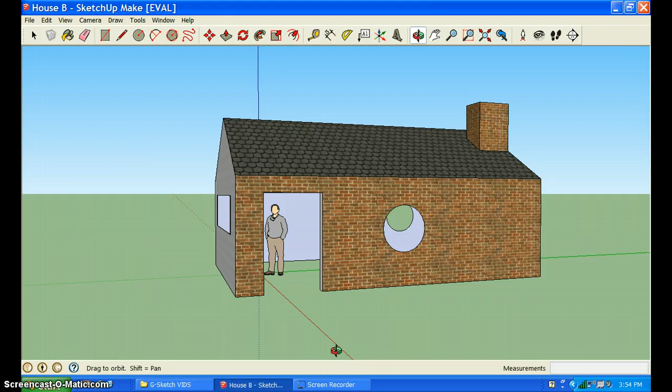This is part 3. We're going to put a little addition on the house today, a little overhang or shade area with some posts to hold it up. And in the next lesson we're going to be doing even cooler stuff.

So the first thing I'm going to do is turn this little thing around. I've got my orbit tool selected. I'm going to turn this around because I'm going to put a covered porch area on this end of the house, and to do that is pretty simple.

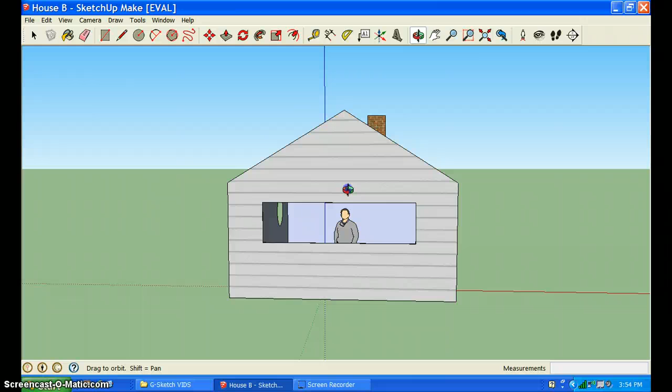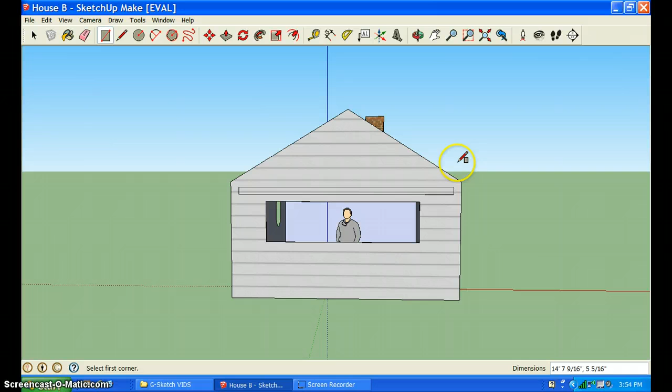I'm just going to click on the rectangle tool again and go up here. Now, I'm not going to go to the edge or an endpoint, I'm just going to stay right on the face near the corner there. I'm going to draw a wide, but not too top-heavy rectangle. There we go, that's the size rectangle I like, or pretty darn close to it.

Now I'm going to use my push-pull tool right here, and this is what you've got to be careful of. Right now I have selected the whole side of the house, and I don't want to do that. I want to select that little rectangle, so I have to make sure that when I move this down, I get that little arrow, that's what I want. See the little dotted lines?

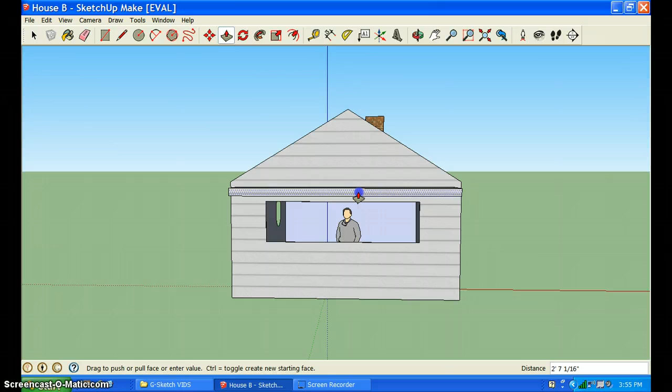Now I'm going to click and hold my mouse button down, and as I pull it down, I'm actually pulling out. Can you see how that's going? Now this is kind of a guessing game.

I'm going to let go, go back to my select tool, switch over to orbit and turn it sideways, because I don't know if this thing is out too far or not far enough. So let's take a look at it. Oh, I just got lucky there, because that is just exactly right.

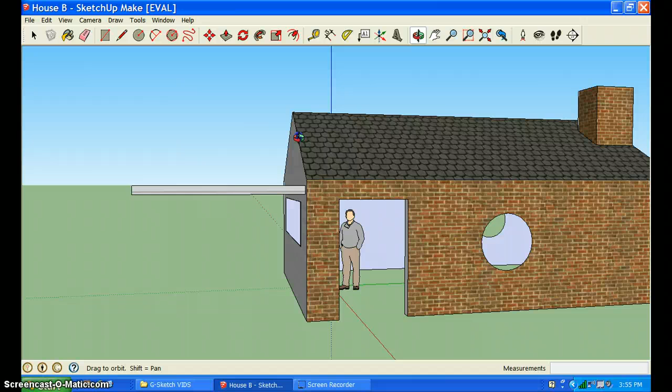Now if it was too short, I'd just use the push-pull tool again, push it in. And if it was too long, push-pull, push in, push out. Okay? So now I'm going to go over here.

Now I have to get something supported, because it's probably not strong enough to just hang out there on its own. So what I'm going to do, and hopefully this will work smoothly for me - usually it does - I'm going to use my circle tool.

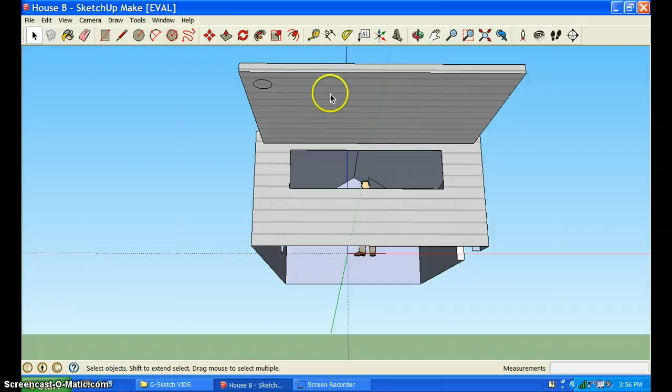And I'm going to draw a circle right kind of in the corner here on the face of this overhang. There we go, that's what I want. Now you can see I've still got the circle tool selected, so I'm going to go back and use my select tool. Always a good idea to go back to the select tool in between things so you don't get all confused and have extra things happening that you don't want to have happen.

Now I'm going to get to my push-pull tool. Now this one can be not tricky, but you have to pay attention to this one. Push-pull, and again, I don't want to select the whole underhang here, I want to select just the circle. Now, when I start to pull this down - yeah, see that cylinder? That's pretty cool.

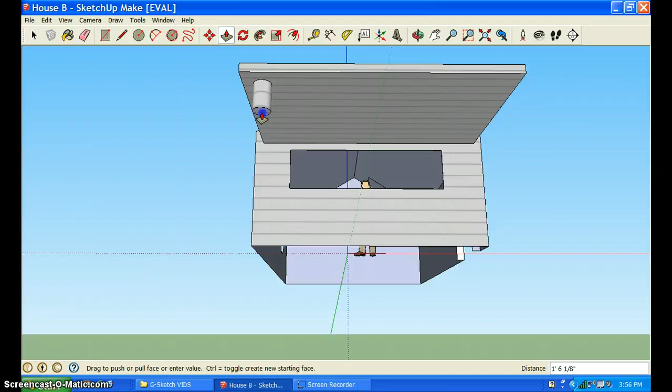But, pardon me, I need to make sure that this thing reaches to the ground. I don't want to have it going down under the ground, and I don't want it to be too short of the ground. So what I'm going to do, as I'm pulling it down, I'm still holding my mouse button down - I haven't let go of it yet - I'm going to take my mouse over to the corner of the house over here, and I want to hit a little line. There it is, this endpoint. Now I'm letting go with the mouse.

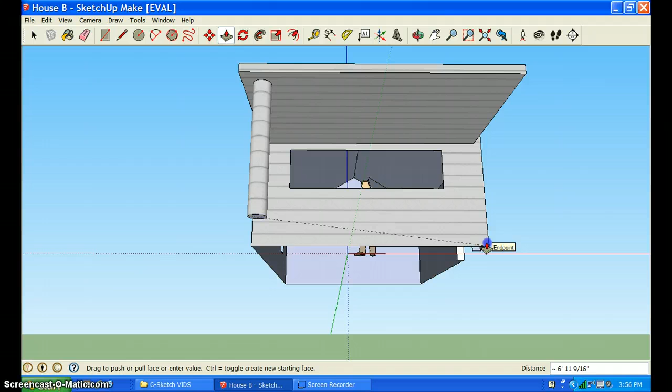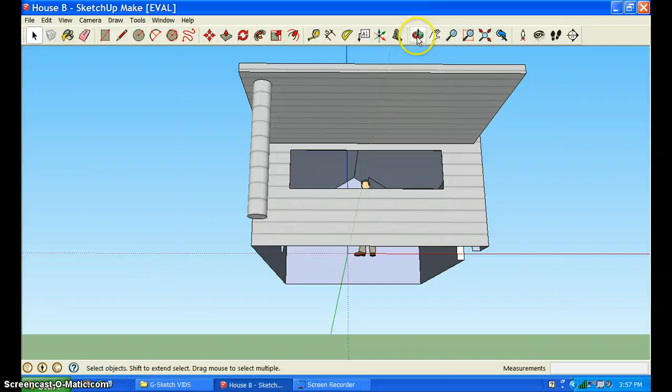I'm going to click on my select tool and turn it sideways. And if that worked correctly - once I started to pull down, I was dragging down for the push-pull tool and I was holding the mouse button down, I went over to the corner - that should have told this thing to stop at ground level. Right now it looks like the whole thing's up in the air, but let's rotate it around with the orbit tool. Yeah, see, now it's on the ground.

That's perfect. Now I need another one of those, don't I? I sure do, and that'll go up in this corner. Now here's what I want to do - I could do that whole process again, but the odds of me getting it exactly the same size and the same length, probably not a good chance for me to do that.

It's probably not going to work out too well for me. So what I'm going to do is try to copy this pillar, this column, and paste it over here somewhere. If everything goes smoothly, it'll be great. And if not, we'll have to fix it again.

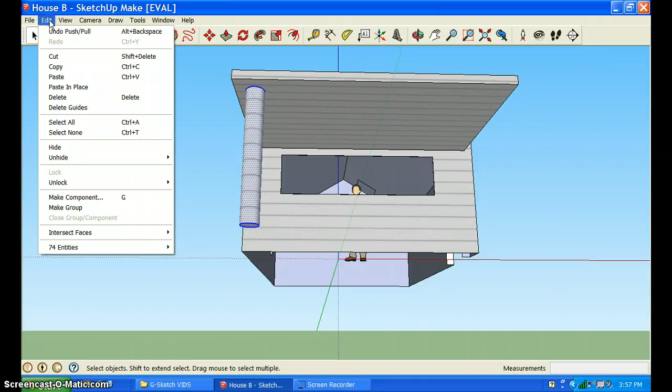Let me go here and use my little select tool. All I'm going to do is draw a box with the pointer around that column. I have to make sure I get the whole thing because I want it to turn blue. Yeah, that's what I want to have happen. Now I'm going to go to Edit, Copy.

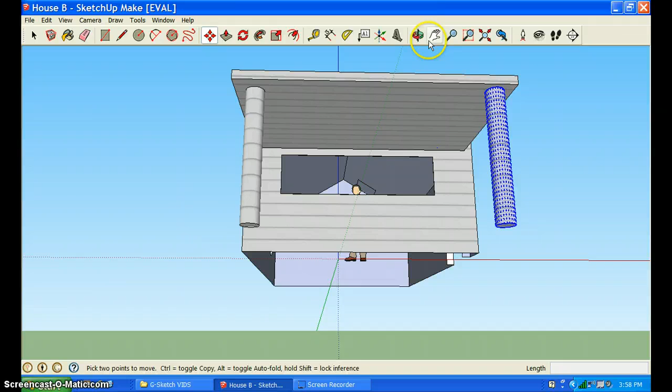I'm going to go over to here. Actually, I'll go out here even. I'm going to do Edit, Paste. And now I've got the column. There we go. Come on inside here, column. I think that's pretty much where I want it. Let me look at it sideways again. Yeah, perfecto. Now it looks all blue because it's still selected.

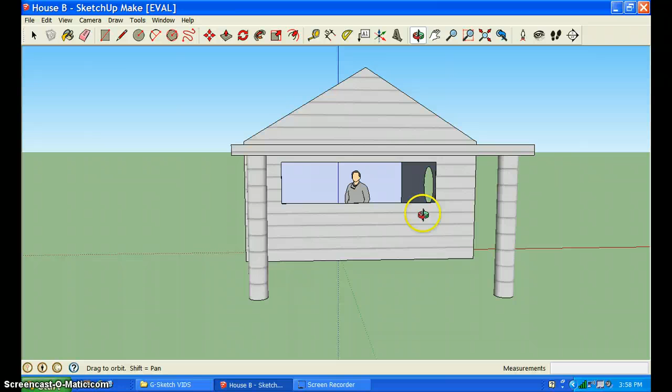So I'm going to click over here, click somewhere on the horizon, on the ground, or on the sky to deselect it. All right, there we go. Now let's take a look around. That one I didn't have to bother going to the opposite corner down of the house to make sure it was the right length because I copied it exactly from here.

So now when I do this, I can see I've got a nice covered porch, which is great because in our next lesson, we're going to put a picnic table right under here. Wait to see how cool that is.

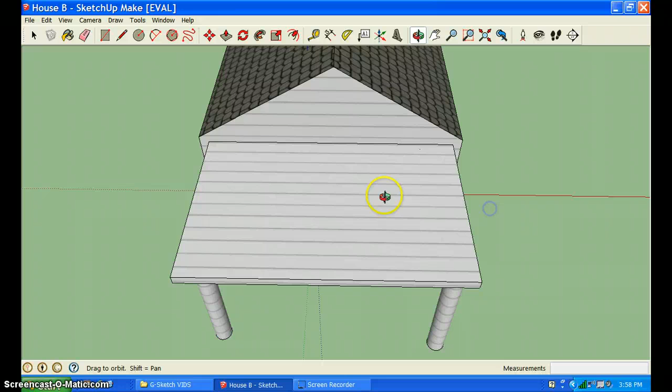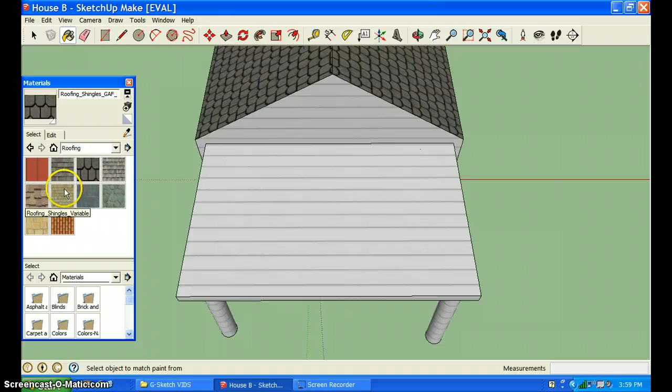Well, I got to make a few little adjustments here because I've still got the siding up here, and siding for the side of the house should not be used as a roof. So I've got my roofing here. I'm going to change this to roofing. I'm going to go over here real quickly to my paint bucket. Oh, I've got the roofing already selected. How about that? If I didn't have it, I would go down to roofing. There are my choices. I think I'll make one that matches. Here we go. And then just click on this face right here.

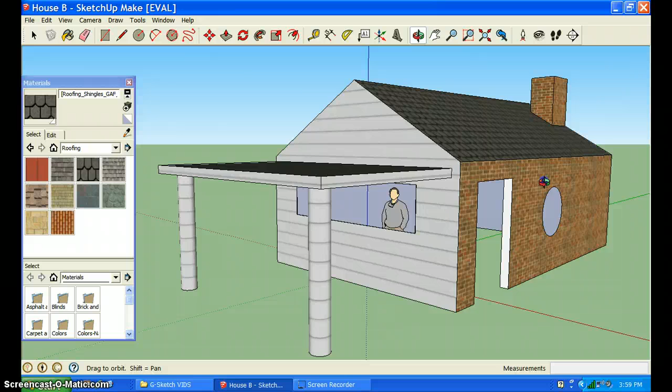I like that. Okay, now the other thing we can do is use my orbit tool, change the camera around. This little siding, that looks good, but I don't want the siding. Siding wouldn't be wrapped around like that. But I might do brick. I could make those brick. I think that would be cool looking if I can get it to work right.

So let me click here on where it says roofing in my little materials area, and I'm going to go to bricks and cladding. I believe this is the brick I used for the front of the house. I did a brick front house. I'm going to click on this and see what happens. Yeah, that's what I want. Exactly. I'll go over to the paint bucket, click again.

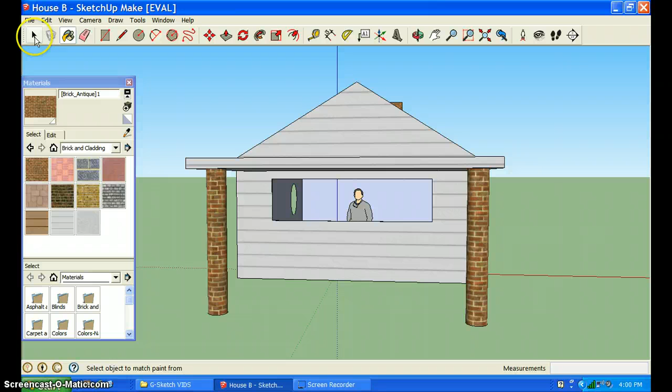And now when I use the orbit tool, well, let me go back to my select tool first. Always got to try to remember that select tool in between everything so nothing gets messed up. Now I'm going to move around here. I think I like it.

The only thing I might do for a little detail, I might change the color of this siding here so it looks like it's an overhang even from other areas. So maybe I'll do this. Maybe I'll go back to the paint bucket, and let me see here, I don't want to use brick. I'm not going to use roofing.

Let me go to colors. I may just do a solid color, maybe just a darker gray. How about that? Click on it. Click here. Yeah, I think that stands out a little better.

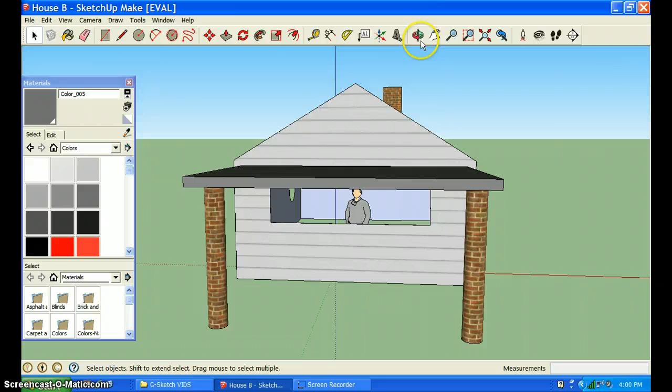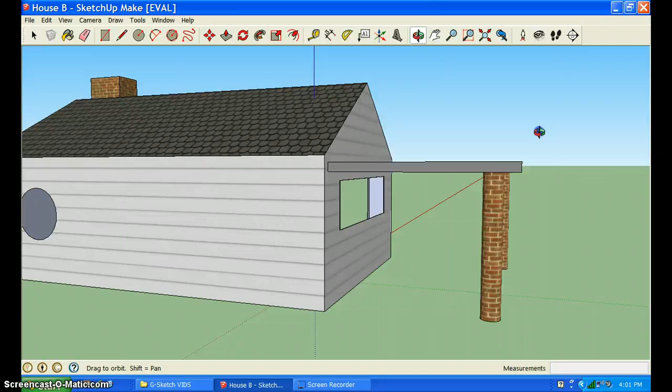Now I'm going to go again to my select tool, rotate around because I have two other faces I have to do here. Click on the color again, click on the side, rotate. Click on the color, click on the side. Yeah, I think we've got it. I'll close this up, click here, rotate around. And now I've got a nice house with a cool looking little overhang.

That is Google SketchUp, The House, Part 3. Hope that was helpful.